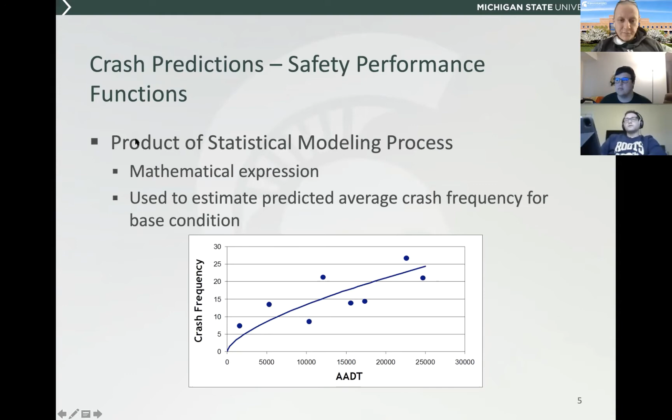Okay. And so the general forms of these SPFs are basically as shown here. Now we're lagging a little bit behind where we'll get to this type of content in CE 849. But essentially the way these models are structured, they're going to take the form of a Poisson or a negative binomial model.

And so in this case, we can use similar methods to what have been introduced for linear regression, with the big exception there being that we're essentially transforming our dependent variable here. So instead of estimating a model for crashes as a linear function of predictors, we're basically estimating a linear model for the log of crashes as a linear function of predictors.

And so, the way the models are presented, estimating the log of the number of crashes, and we had talked a little bit about this in 849, is not particularly useful from a practical standpoint, because if I tell you there are going to be the log of 3.4 crashes or whatever the case may be, that's not a very meaningful number.

And so the way these models are presented, they've been transformed such that we're predicting the number of crashes at a site rather than the log of the number of crashes. And the primary implication there is that the linear function on the right-hand side that we typically see is now exponential in nature instead. Okay. So we've got the log of crashes as a linear function of these predictors, and then we exponentiate both sides, and this is the final form we arrive at.

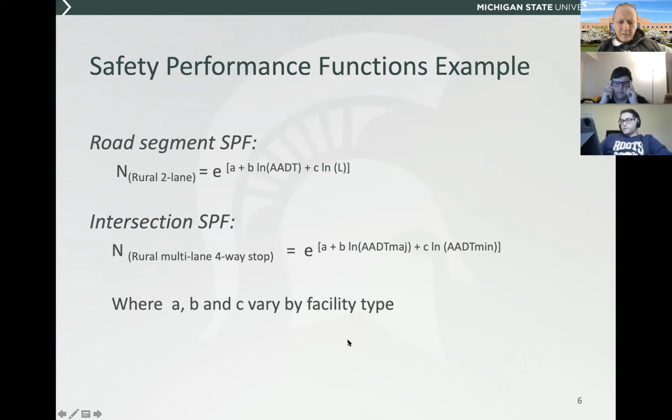Okay, and so like I said, these are developed so that they can be used for predictive purposes for quote unquote base conditions. And this is also very analogous, if you recall, to the Highway Capacity Manual, where we would assume base conditions that would include 12-foot lanes, 6-foot shoulders, no interchanges in the case of freeways, no access points in the case of multi-lane highways or 2-lane highways, and so forth. And then we basically adjust from these base conditions when they don't apply. So we'll have factors that would either, in the case of the HCM, increase or decrease travel speeds, as the case may be, or increase or decrease volumes.

And in our circumstance, we developed this base model that gives us a predicted number of crashes for some traffic volume range. We assume base conditions, and if those base conditions aren't met, we'll have crash modification factors that are introduced that functionally will basically shift these lines up or down, depending upon whether those variations from the base conditions tend to increase or decrease crashes. Okay.

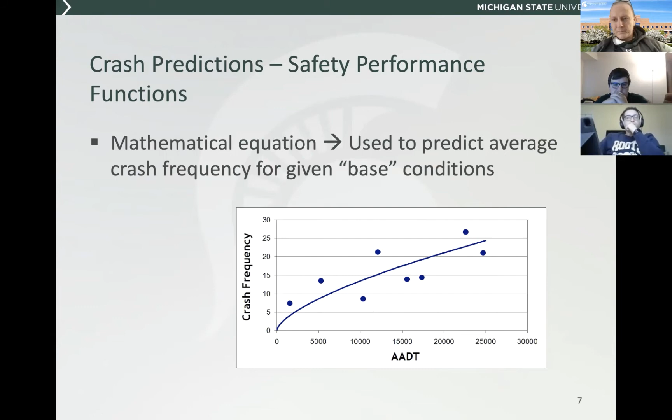Okay. And so with these empirical models, we can take any given intersection, and if we have an estimate of the AADT on both of those roads, we can use this to come up with a baseline prediction that, again, is based on empirical research using data. In this case, I think these data were drawn from the states of Minnesota and Washington.

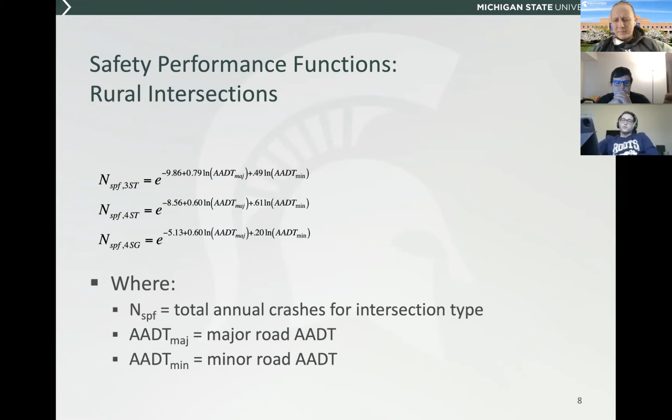Now, this kind of leads to one of the potential criticisms that I would have about the HSM generally, is that they get to very precise estimates of various subsets of crashes. If we're looking at a three-leg signalized intersection, and you think about the types of single vehicle crashes that would occur there, those would tend to be relatively rare events. And so the average frequencies here are ranging from 0.1 up to a maximum of just over half a crash or 0.6 crashes per year, okay?

And so consequently, then we have a very large subset of models. And one of the other concerns I have with the Highway Safety Manual is that each chapter basically focuses on a different facility type. So chapter 10 is rural 2-lane.

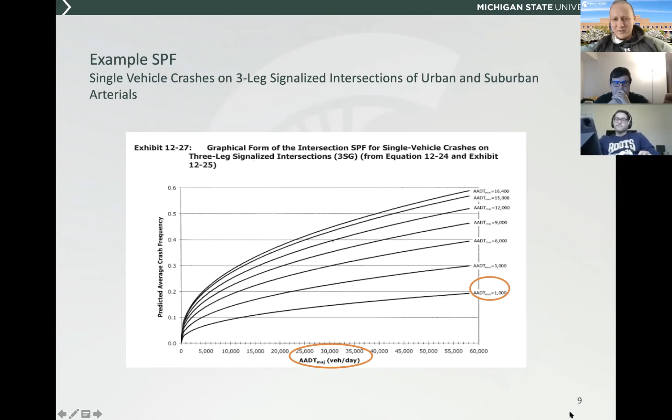Okay. So like I said, we've got the 3 general facility types in the first edition. The supplement that was published subsequently focuses on interchanges. And then there are a series of other companion projects from the NCHRP, and some of the deliverables from those projects are basically draft chapters or sections of draft chapters that'll be in the second edition of the HSM.

Okay. And so I talked a little bit about base conditions, and you'll notice a lot of these base conditions are somewhat similar in nature to what's used in the HCM for operational analyses. So in the case of intersections, we're assuming all those intersections are right angle. As those intersections become skewed, we tend to see an elevation in crash risk. We also assume that there are no auxiliary turn lanes at the intersections. And I think I've talked about this a little bit before in this class, but I might be mixing this up with 849. Have I talked about turn lanes and trying to assess their impact from a safety standpoint?

We've done several studies where we've found counterintuitive signs for some of these variables. So for example, we'd see intersections that have auxiliary left turn lanes experience more crashes. And I think that's a faulty premise generally. You install the left turn lanes oftentimes because you have operational or safety problems with those left turning vehicles and you want to pull them out from the through traffic. But typically, if we're estimating models that would have just major road and minor road traffic volume, one of the things we're not capturing there is the difference in turning movements across these different locations.

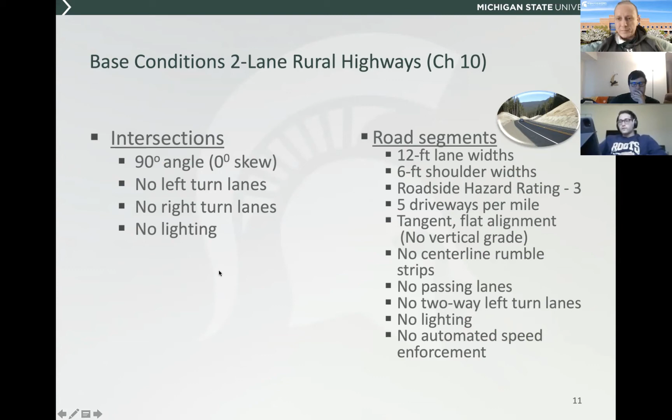So if they had segments where passing lanes were present, as an example, they would estimate that as a binary indicator. And so if you think about the coefficient on that variable, when that condition is equal to 1, we'd estimate that beta, and that would tell us how much we would shift that line up or down from the base conditions, just like we've used binary indicators in the linear regression framework in 849. Okay. And the same thing is going to be true for any of these other features. So as we diverge from these base conditions, those models have essentially been calibrated such that when all of these base conditions are set equal to 0, or all these conditions are true, then you would match essentially with the baseline model from the HSM, and then you would tend to depart from that as you diverge from these base conditions.

Okay. So Chapter 10, Chapter 11 are somewhat similar here. So we see the same general base conditions for intersections. For road segments, again, 12-foot lanes. So multi-lane arterials, we tend to see wider shoulders than we would on the rural 2-lane system. So 8-foot shoulders here, and also a 30-foot median. And as in the preceding case, we're assuming no lighting or automated enforcement present.

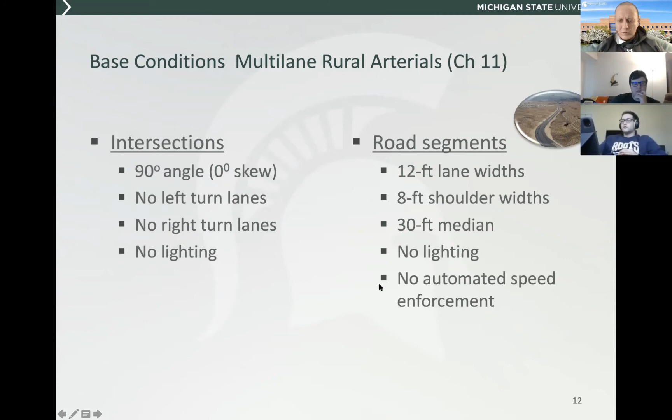And so as an example here, we can just work directly with that 4-leg signalized intersection model that was presented previously. So if we've got a roadway with an 11,000 AADT on the major road and 7,000 on the minor road, we can predict how many crashes would be expected. Oh, rats, should have changed that to 2021, apologies. In 2020, assuming similar traffic volumes. And so in this case, we're just applying this model directly, plugging in those respective traffic volumes. And so on that basis, we would expect that an intersection with those volumes would experience roughly 10 crashes, or in this case, 10.1 crashes per year.

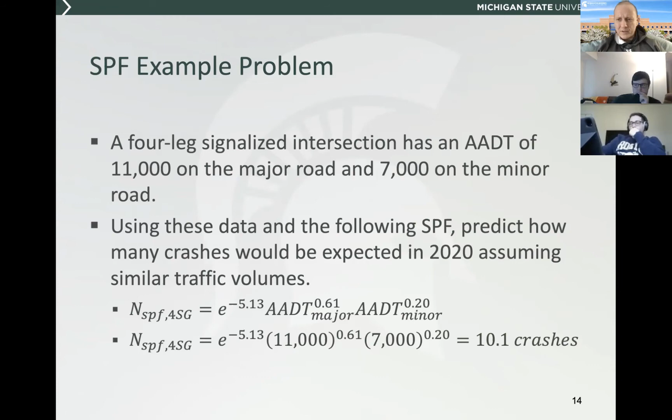And so I've used the term crash modification factor several times previously. What those CMFs are basically representing is they're a scalar that tells us how much crashes are going to change by if we implement some type of safety treatment. So it's simply the ratio of how many crashes we'd expect to see with the treatment versus how many crashes we'd expect to see without the treatment in place.

And so I'm introducing some of the general nomenclature we'll see in the HSM. These SPFs are generally used to determine the predicted number of crashes at a given location. We start with the baseline safety performance function, and then in any cases where those baseline conditions aren't met, we multiply that baseline condition by these CMFs. So at the end of the day, after you apply all those CMFs, the end result is how many crashes you would expect to see for a roadway with those select traffic and geometric characteristics.

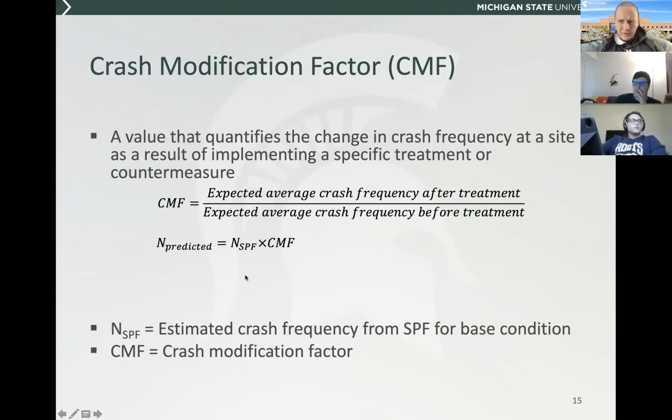Okay. And so the next slide, I think, goes through an example here. We actually just had a kickoff meeting for our MDOT roundabout evaluation project yesterday. So we'll be developing some similar CMFs here in Michigan, but in its current form, the HSM provides a CMF of 0.52 for total crashes where a roundabout is converted from a signalized intersection. So basically a bunch of data were collected nationally for these types of conversions, and on average, crashes were reduced by 48%.

And so we can use that information in combination with the preceding estimate to try to determine how many crashes we'd expect to see at the roundabout as compared to the 4-leg signalized intersection. As we had noted previously, we've already applied that safety performance function that showed us a 4-leg signalized intersection with 11,000 vehicles on the major and 7,000 on the minor would experience 10.1 crashes on average. And so if we reduce those by 48%, we end up with 5.3 crashes at the end of the day.

Okay. And so in this case, this is a very broad and very general conversion because there's a lot of nuance that comes in the roundabout design. So beyond this general CMF, we could also look at other CMFs that would relate crash performance at roundabouts to some of those different design parameters of interest. Okay.

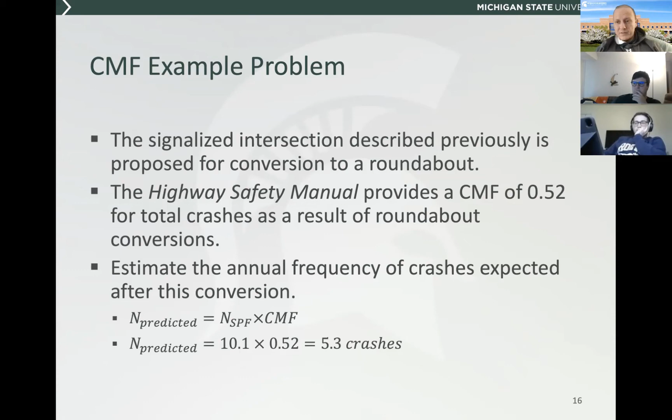And so are you familiar at all with the CMF Clearinghouse? Okay. So the FHWA maintains it, I think this is contracted through the University of North Carolina Highway Safety Research Center currently. This is basically a website that details a very wide range. There's probably thousands, or tens of thousands. There's a huge number of CMFs that have been developed here from prior research. And North Carolina is under contract from the FHWA.

They basically review the fundamental research reports and the journal papers that have introduced some of these CMFs, and then they apply a qualitative rating scale, basically a 5-point star rating scale based upon factors like how large was the sample that was used to develop that CMF, how rigorous were the methods, so did they use just the naive before and after design, did they use a control group study, did they use an empirical Bayes method, and there's a variety of other metrics that are utilized there. So it's viewed as a one-stop shop to get any and all information you would want to help inform design decisions and safety forecasting generally.

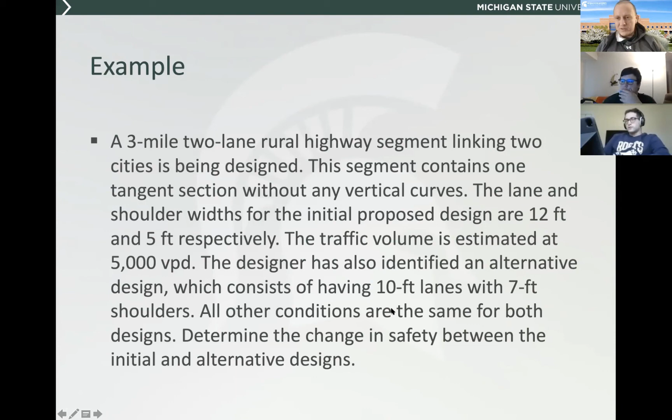And so we basically want to compare that existing proposed design to an alternative where we'd be using 10-foot lanes and 7-foot shoulders. And so if we assume everything else is the same, we're going to use those SPFs and CMFs to derive estimates of what the change in safety performance would be ultimately.

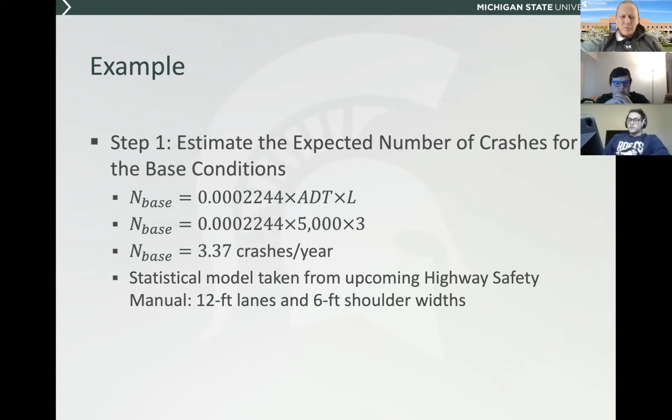Okay. And so the first thing we would do is we would take that baseline SPF and plug in our base conditions, which in this case would just be the traffic volume and length of that segment. And so, like I said, 5,000 vehicles, 3-mile segment. And so we'd expect to see 3.37 crashes per year, okay? And then from that, we would want to determine the appropriate CMFs.

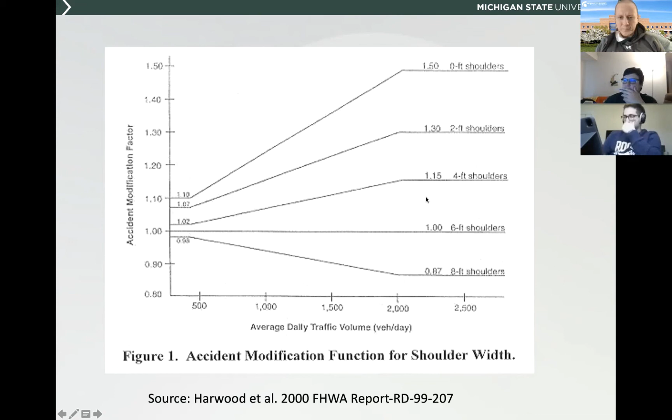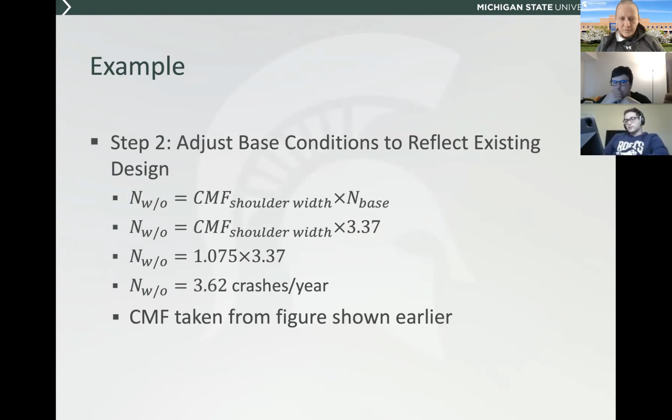And so from that preceding example, and just that 1.075 number, we had 5-foot shoulders, so we're halfway between those two lines essentially, okay? And so in that case, we would see an increase to 3.62 crashes per year from the 3.37 we saw previously when we had the 6-foot shoulders, okay?

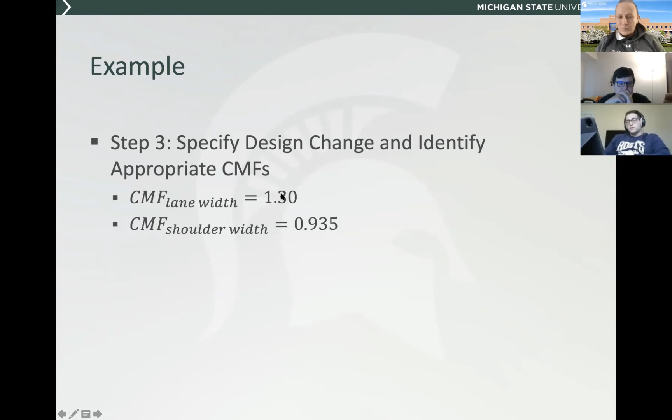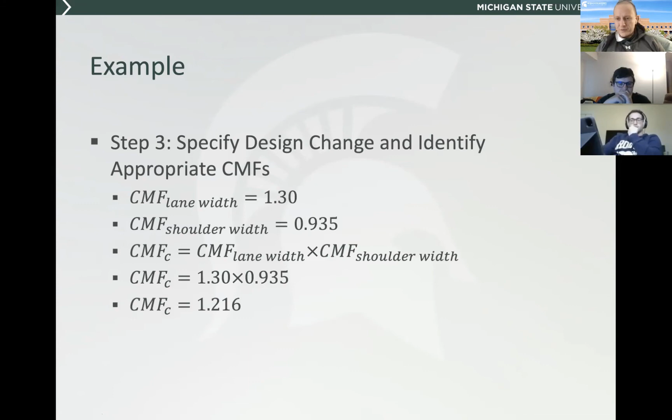And so as we look at the lane width and shoulder width adjustments here, we've already worked through the example for 12-foot lanes and 7-foot shoulders. And so if we look at 12-foot lanes and 5-foot shoulders, if instead we look at reducing those lane widths from 12 feet down to 10 and increasing the shoulder width from 5 to 7, we see an increase in crashes as we reduce the lane width, and then we see a decrease in crashes as we increase the shoulder width. And so collectively, those two effects, when taken in combination, would give us a 21.6% increase in crashes on average, okay? And so we can apply that directly.

And so in this case, we're basically just taking the ratio of how many crashes we would expect to see with the narrower lanes and wider shoulders as compared to the wider lanes and narrower shoulders. And so our change in crashes here is basically 0.47 per year, okay? And so in this case, that would be an increase of 0.47 crashes per year. And so this would give justification for the initial design we started with, where we had the 12-foot lanes and the 5-foot shoulders. Does that make sense?

Okay. All right. I'm a little behind schedule for various reasons today. Do you guys have a hard stop on the back end? Okay. So it would be good to get through this. I was going to say alternately, I can just record this and post it to D2L,

but we've worked through the empirical Bayes method the past 2 weeks. In the HSM, they've basically taken that same approach and they've kind of streamlined it and used slightly different nomenclature rather than having to memorize that pi is our expected number of crashes and lambda is the number of crashes we experience after implementation. We use slightly different nomenclature here, but the general setup is the same.

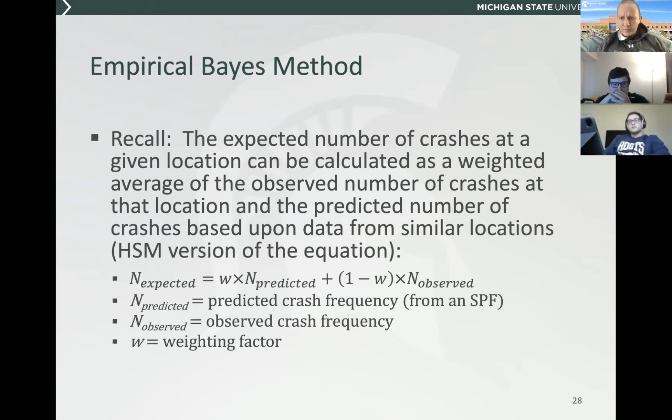And so our expected number of crashes is a function of what's predicted from the empirical equation and what's actually observed. And these weighting factors are analogous to the weighting factors that were introduced last week. And those are calculated using a factor that incorporates the overdispersion parameter that we had introduced previously. And we'll walk through that, I think, on the next couple slides here.

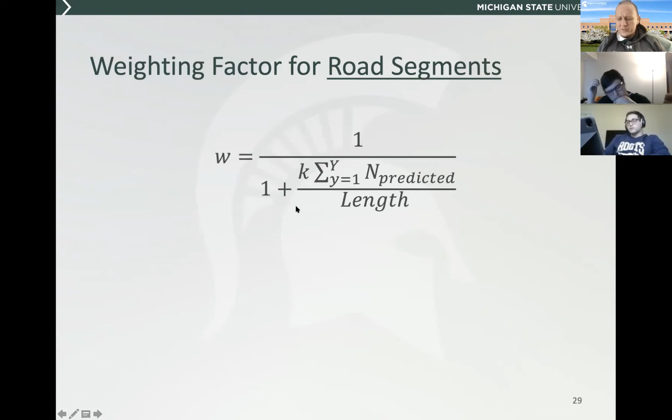So in the case of road segments, that weighting factor is calculated using this equation, which looks somewhat similar to what we had presented previously. So that weighting factor is a function of these different characteristics here. So first of all, the overdispersion parameter, and so just as we had talked about last week, that overdispersion parameter is giving us a sense of how much variability and/or how much precision we have in those SPFs that have been estimated, right?

And so the larger that overdispersion parameter, which last week I believe we introduced as alpha, K is just alternate terminology that's used in the HSM. And so the larger that value is, the less reliable that predictive equation is, okay? And so consequently, as our overdispersion parameter gets larger and larger, the denominator here gets larger, that weighting factor gets smaller, and as a consequence, we're giving less weight to that equation, okay?

Likewise, we're also giving less weight to the predictive equation when the number of crashes we expect to see is larger. And so all we're essentially capturing there is sites that experience more crashes, those estimates tend to be more reliable from year to year. And so regression to the mean is a lesser concern on high crash segments versus low crash segments, just given the inherent variability in crashes.

And then likewise, the length of the segment also plays a role here. Now that's going to actually work in the opposite direction, because in this case, the longer the segment is, as that gets larger, then you're going to see that this term on the bottom tends to get smaller. And so we're giving more weight to the predictive equation in that case. And that's essentially just a function of how we incorporate that length into our regression equation, okay? And so otherwise, this is fairly analogous to what we had presented last week with the EB approach, okay?

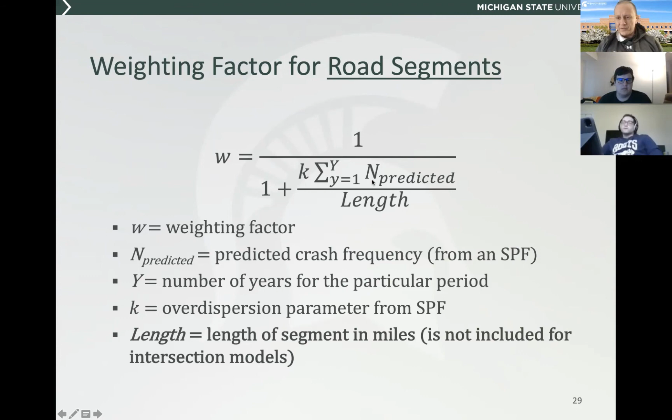In the case of intersections, it's exactly as you would see here, except there's no length component. So it'd just be 1 over 1 plus K times the summation of the predicted crashes, okay? And so as an example, if we've got a road segment that's 1.8 miles in length with an AADT of 4,000 vehicles per day that's observed 12 crashes, we can then try to estimate an expected number of crashes based upon that information. And so the predicted number of crashes, we're just plugging in to that same equation we had introduced previously. And so we plug in our traffic volume.

We're provided with what the overdispersion parameter is that corresponds to that equation. And I should note here, when we look at those SPFs, those are generally presented on a per mile basis. And so that's where I had introduced that offset term. So if you've got a 3 mile segment, you would just multiply this estimate by 3, or in this case, the 1.8 mile segment, we just scale that up by 1.8 accordingly. And so under a roadway with 4,000 vehicles per day AADT, we'd expect 2.41 crashes per mile per year. Since our segment's 1.8 miles, we'd expect 4.34 crashes per year.

And then down here, we're just plugging in, again, our overdispersion parameter K is right here. We have 1 year of data here and 4.34 crashes per year, divided by 1.8, which is again our segment length. And so our weighting factor for this specific site is going to be 0.46. And so that's the weight we applied to what's given by the predictive equation. We add that to the number of crashes that were actually observed at those sites. And so then our expected number of crashes is 8.48 per year, or 4.71 per mile per year, okay?

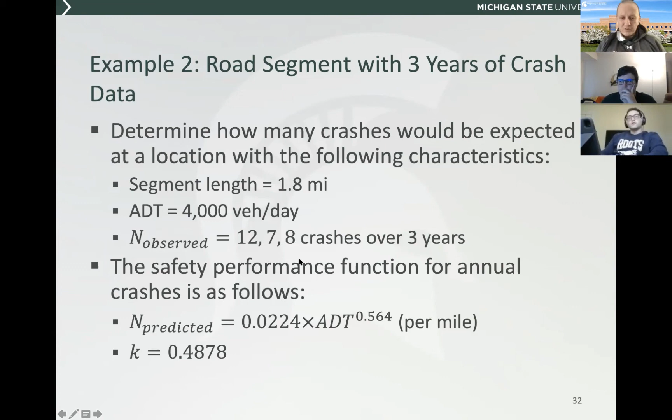So 27 total over a 3-year period. Everything else is as presented previously. And so just working through in an analogous manner here, we're now expecting to see 13.01 crashes over the 3 years. So we're just taking that annual estimate and multiplying by the number of years in our analysis period.

Now, with that increase in our analysis period from 1 to 3 years, you'll notice our weighting factor here has changed considerably, right? Because this 1 is now replaced with a 3. Everything else is essentially analogous here. And so then as we work through here, our expected number of crashes is now 23.92, which is just the weighted average of the 27 we experienced and the 13 that were predicted by the regression equation. Okay.

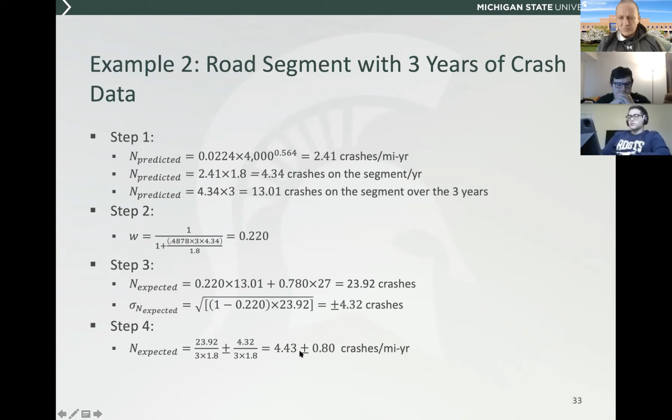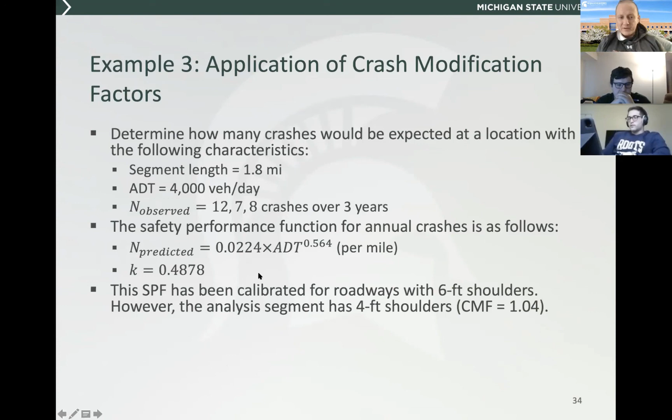And likewise, we can take that standard deviation and we could construct a confidence interval on that expected number of crashes as well. Okay. We can take that same segment and we can integrate crash modification factors directly into the process here. So this is just building upon the preceding example again. And so in this case, the only difference is that baseline predictive model, instead of being our normal base conditions, we've got some sort of change that requires us to scale those crashes up accordingly.

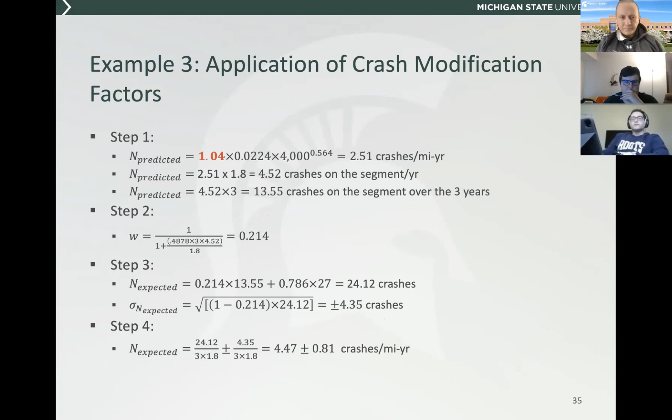And so as we look at this, the only thing that really changes here is we've got a slight adjustment here, a slight increase in the number of crashes that are predicted. And so as a consequence of that, this weighting factor has been reduced very gradually. And then you see what the carryover effects are then on our expected number of crashes and the standard deviation of that estimate. Okay. And I think this is the last one.

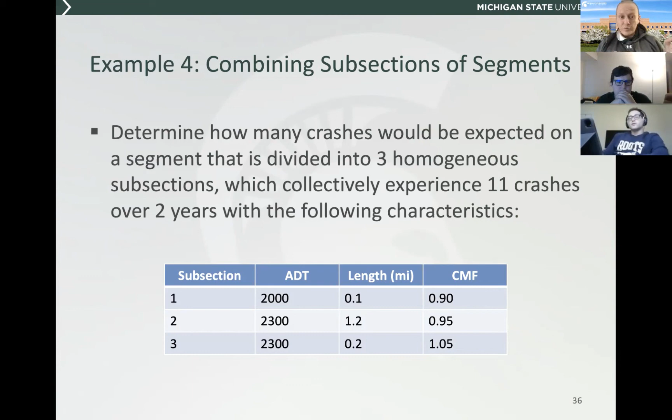Another thing that arises frequently is we're combining multiple segments, and each of those segments has slightly different characteristics. And so combining those estimates in order to come up with either for a larger segment or for the homework assignment where we're looking at a statewide rumble strip installation program, we'd use the same type of approach here generally. And so in this case, we would calculate the predicted number of crashes for each of those individual segments. And then it's simply additive. And so we would sum those respective quantities together.

And so these are all just basically building on the same general underlying framework that's been introduced previously for the empirical Bayes. Okay. And so for this week's assignment, and I did remember your question, Jordan, so you can feel free to ask that after I click through these 2 slides.